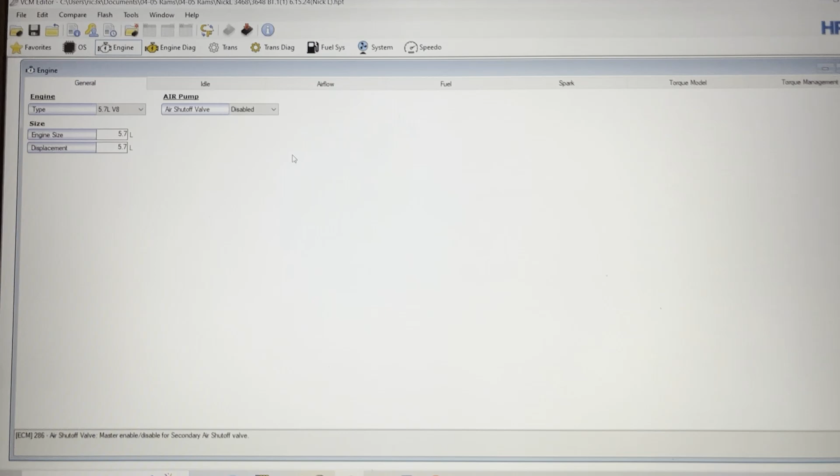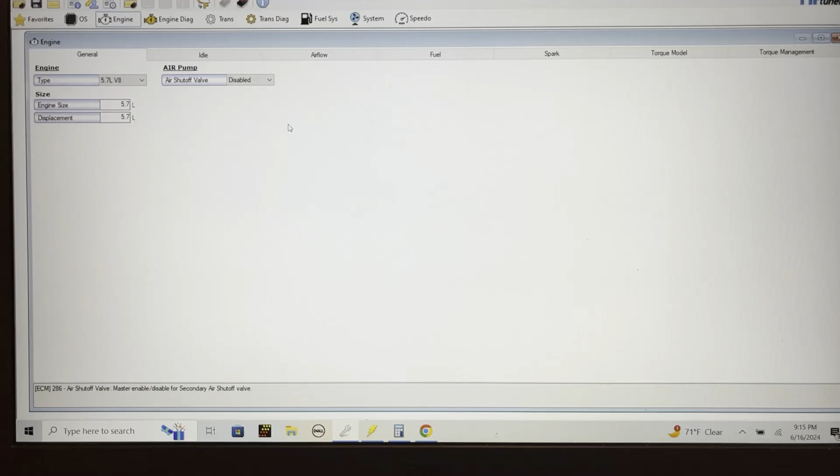Got contacted a couple weeks ago about tuning an '04 four-wheeler, 1500 standard. I believe it's a standard cab, might be a quad cab, but it's definitely a four-wheeler. The guy's got a 6.1 long block in it with the adapters. He's still using the '04 style truck intake. Apparently he's got the 6.1 injectors in it. So we're going to start doing some tune work for it. I'll take some videos of it.

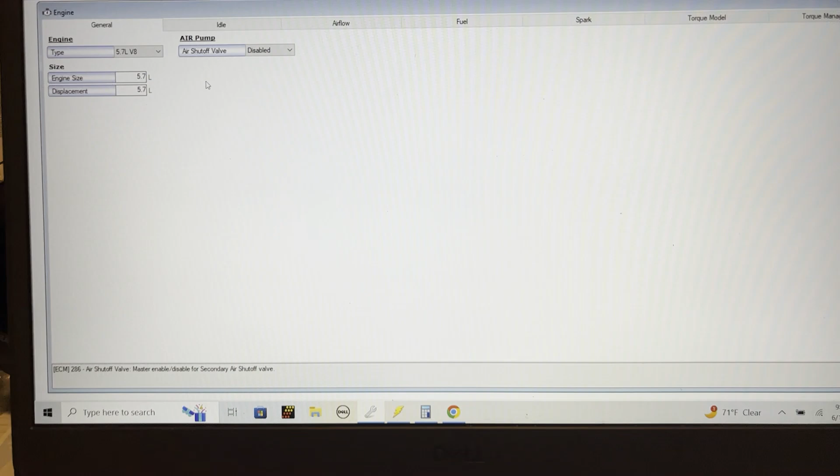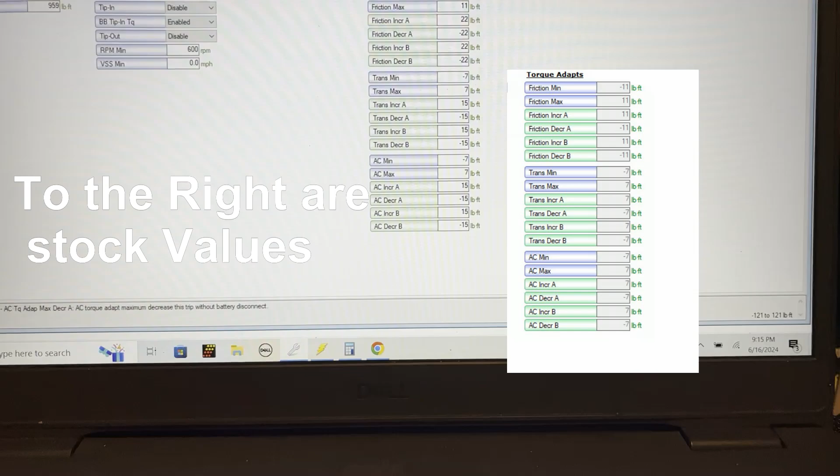So basically, this is the tune that he sent me, that he pulled off the truck with HP Tuners. So I'm going to open up a compare file. So we come over here to my 04-05 Rams. We got that one there, which is stock. And what he's running right now is, for the most part, stock. The startup injectors are different. And the only other thing I found that was different was some of the torque adapts. I've seen this increase here in a couple of 04s. So, fairly stock truck running a 6.1.

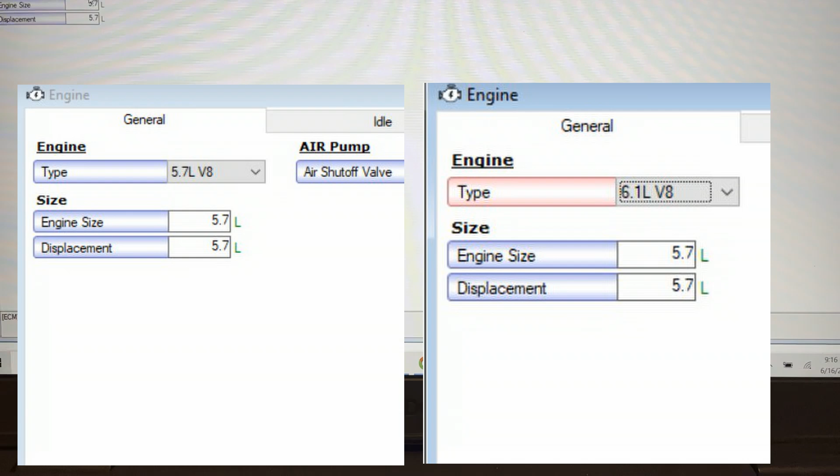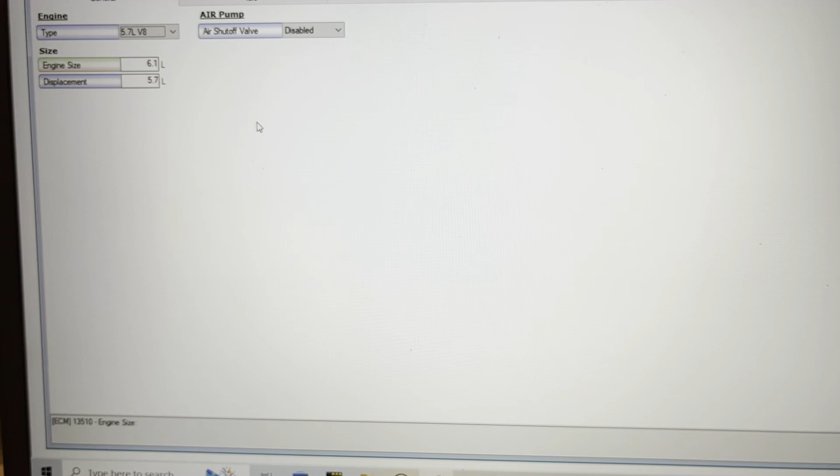So the first thing I did, I switched over to the 6.1. Then I switched this over to 6.1. Sent him off that tune, and it wouldn't start. So I changed engine type back to 5.7. Sent the tune off to him. So it should start with that.

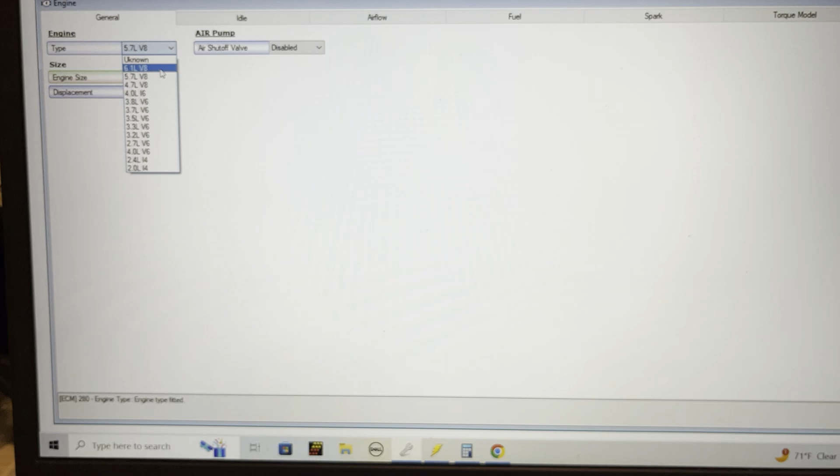I did a pair of my 04s that I got here. Did a test tune on that by changing that over to a 6.1, and neither one of those would start. But my early production 04, it's an August built truck, it'll run when I switch this to 6.1, but the other two wouldn't run when I switched it to 6.1.

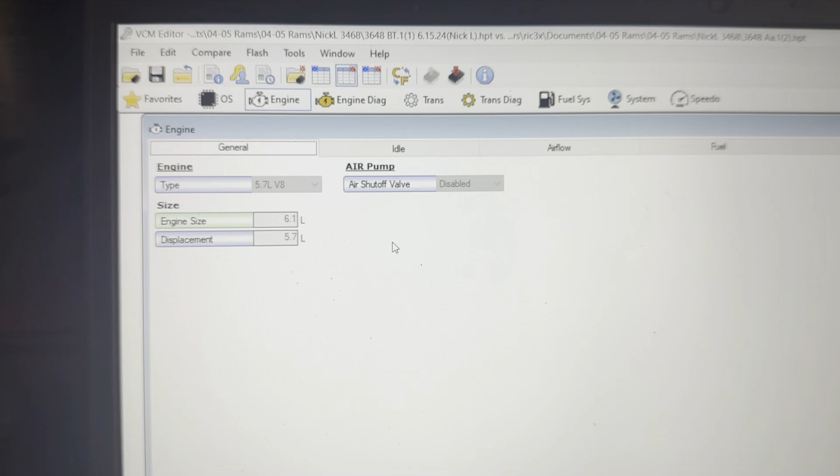Alright, so where do we start? The first thing we do is we increase engine size to 6.1, and we leave the type alone. As I explained earlier, it didn't really do anything for us. Come over here to idle. Let's get into general. I upped the VSS to 5 miles an hour. I do that on all my tunes. I found that it helps with coming to a complete stop, especially if you're doing it quickly.

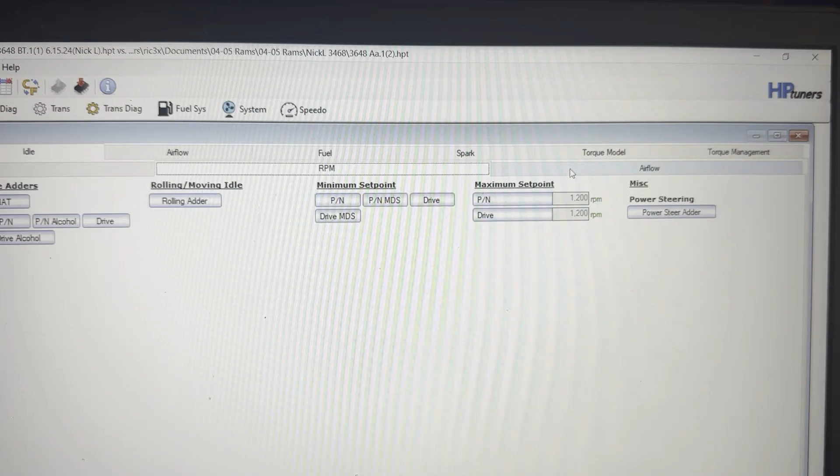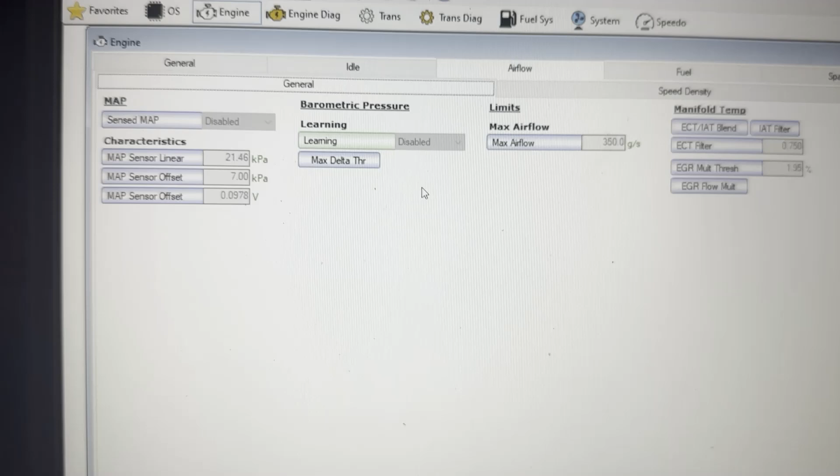So for this first tune, we left RPM. Idle airflow, we left all that alone. We come into airflow, left that alone. Speed density, left that alone. General. In general, what I do is barometric learning, I disable it. I think it just works out better. Especially if you're doing a boosted vehicle, you have to. It just turns into a mess.

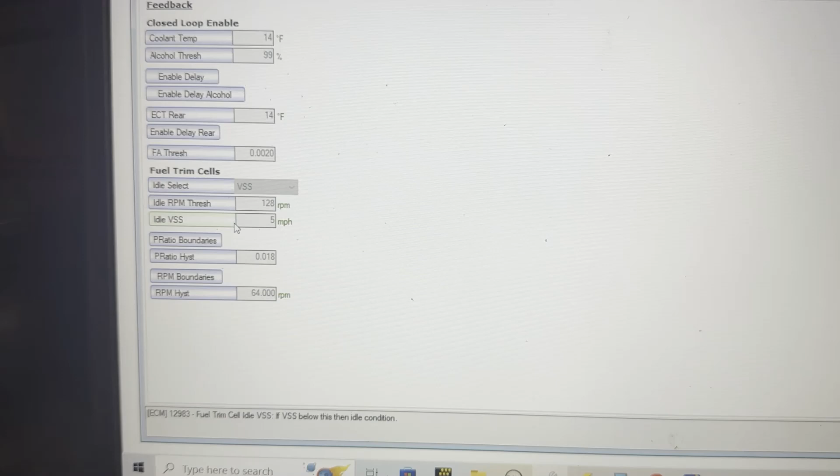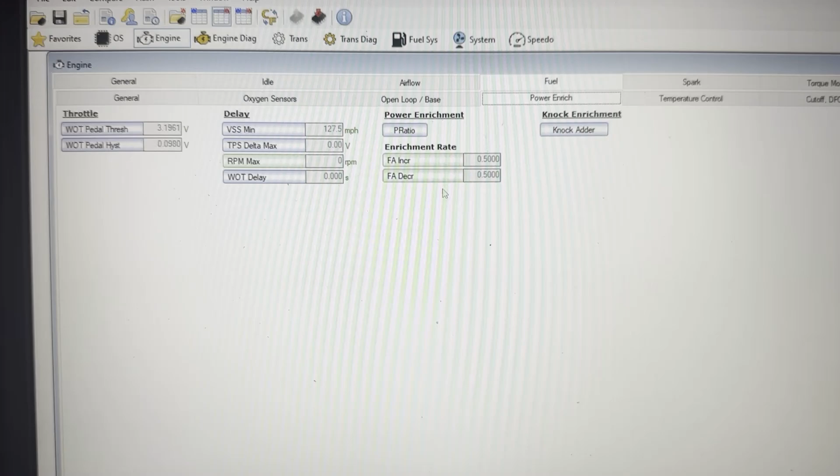All right, so let's go into our fuel. Fuel general, left it alone. Oxygen sensors, here again, up the VSS to 5 miles an hour. They don't have to match, but I just think they should match. So fuel, power enrich. RPM delay, set that down to 0. Fuel increment, I always set these to 0.5. Brings the fuel enrichment on quicker, takes it out quicker. Temp, left it alone. Cut off, left it alone.

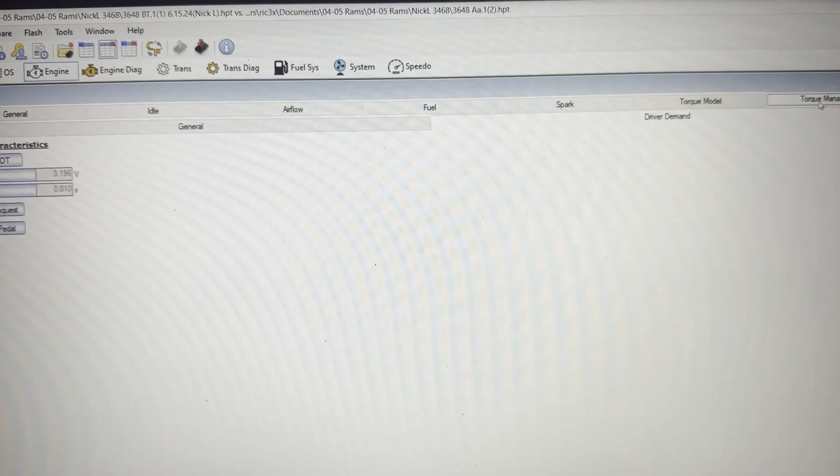Spark, I didn't touch anything in any of the spark. I just wanted to see how the truck was going to react with enlarging the engine size and disabling the barometric learning. All right, so that's where I started.

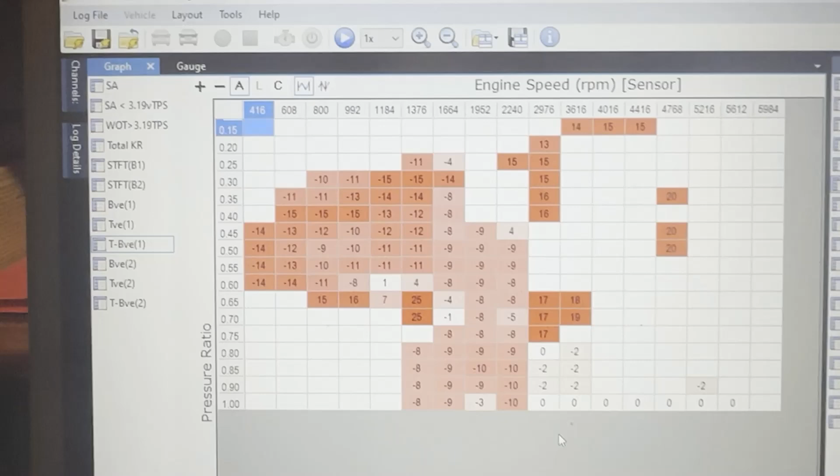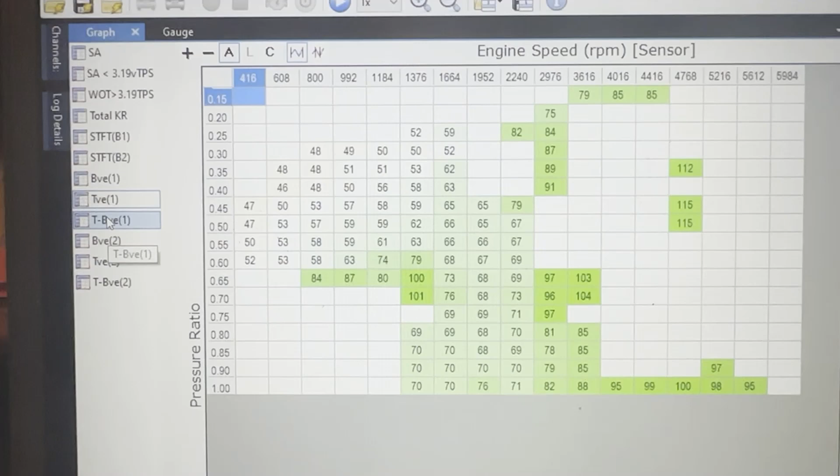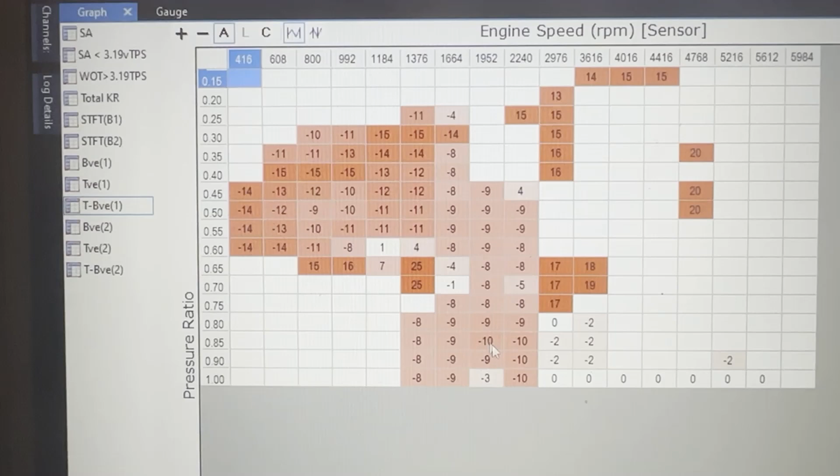All right, so we sent the tune off, and then he did a log, and here's what that log looked like when we go over it. So here is the base VE, and here's total VE. Now, if you notice, a lot of the base VE values are higher than total. So this math parameter that I do, which is total VE minus base VE, that's where it's at. So these are all really shitty numbers. The thing is running way rich.

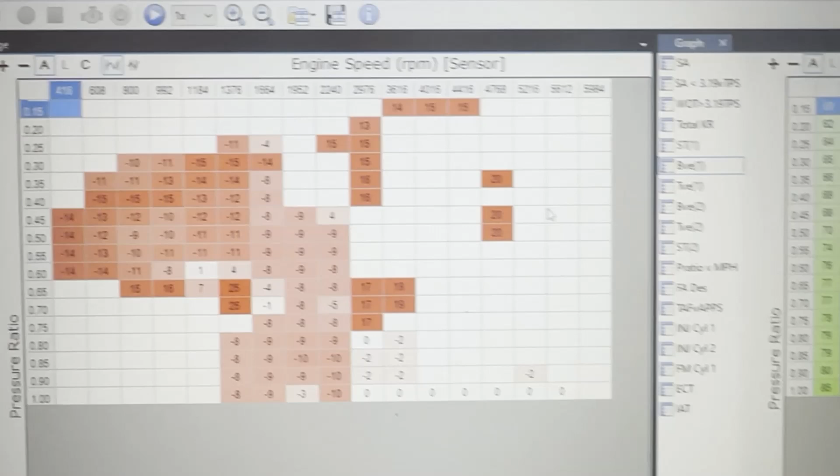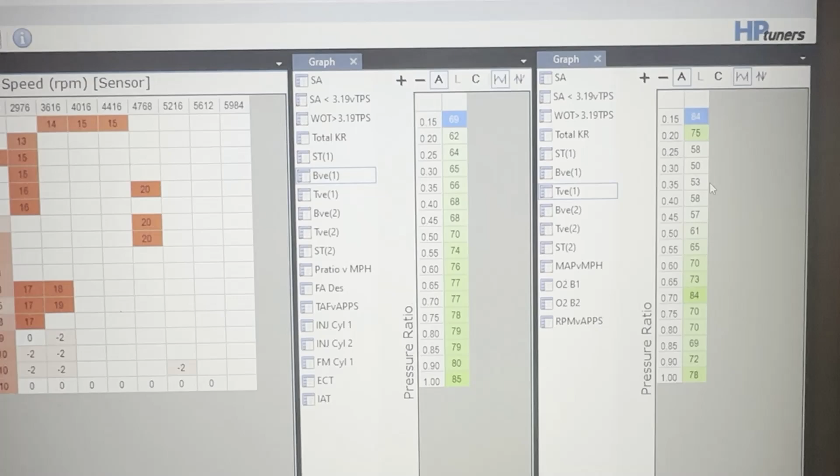So we come over here and we see our averages for our base, and then our averages for our total. These numbers should not be lower than these. All right, so what we wound up doing, keep saying we, and really isn't a we.

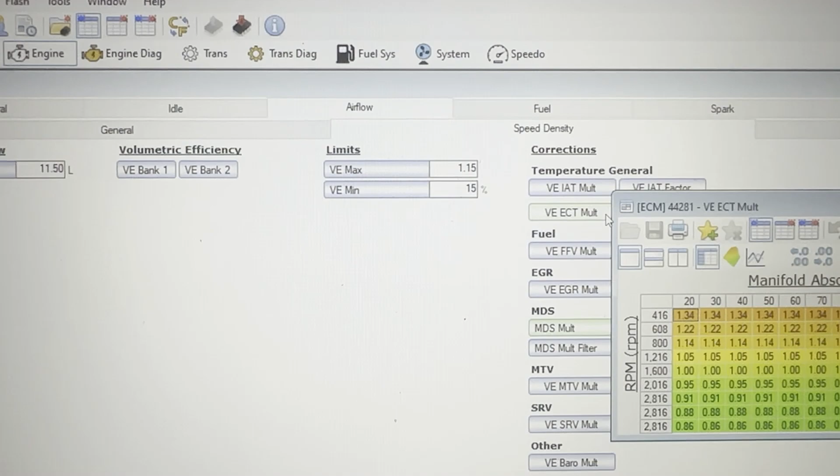But anyway, what I wound up doing was, first step I did was the VE engine coolant mult. I matched these to 6.1 values over top of what they were originally. So this is what they were originally. Actually, here, let me go back to that. That's what it was originally. And then these are the values I turned it into.

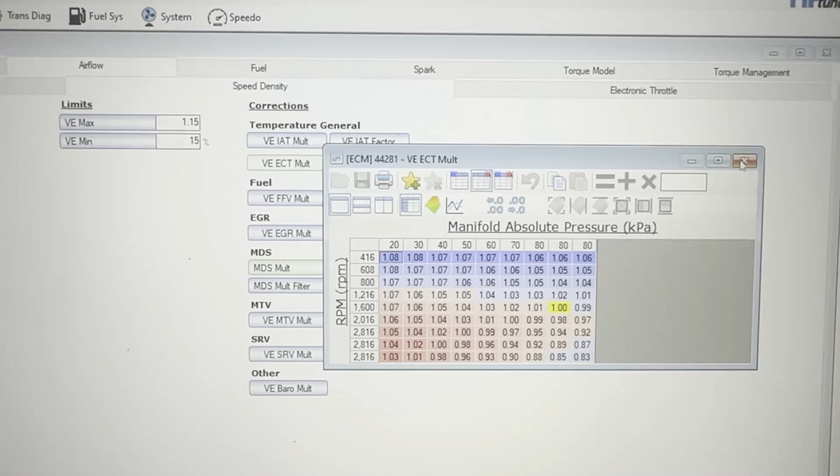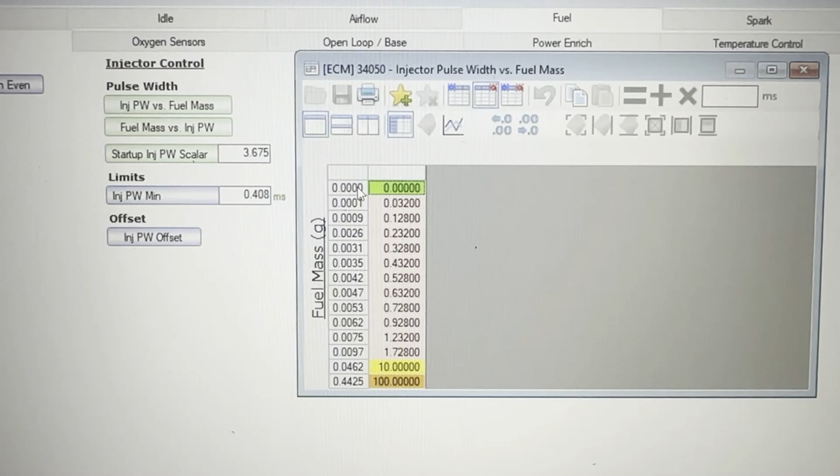And then the other thing we did was on fuel, general. These are all tune 2, and these are all 5.7 parameters. So what I had done was I converted it all over for the third tune, gave it all 6.1 parameters. So then sent the tune off.

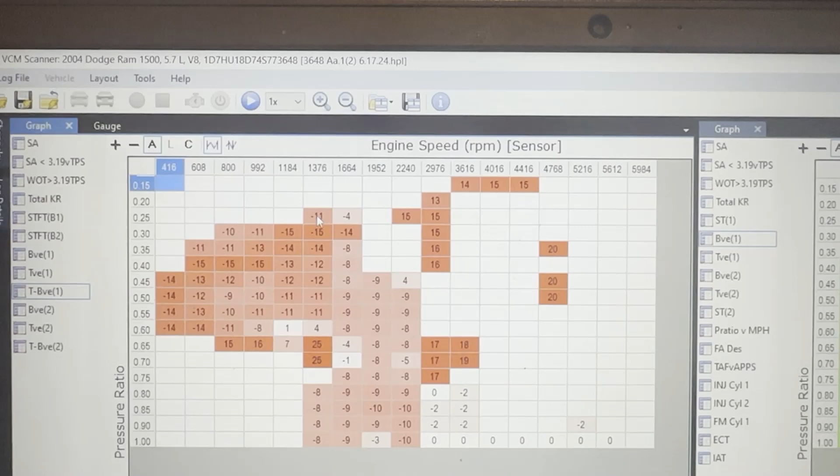Like I said, that was the first one. So this is tune. That's the first one. Let's get this straight. And then this is the third one. The VE was better. So that's where we went. Numbers are slightly closer. We can do short-term fuel. It was pulling and it was adding less fuel for short-term.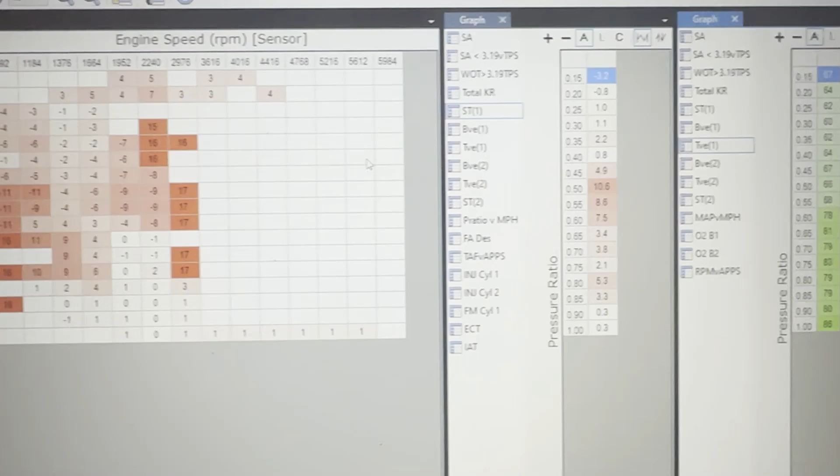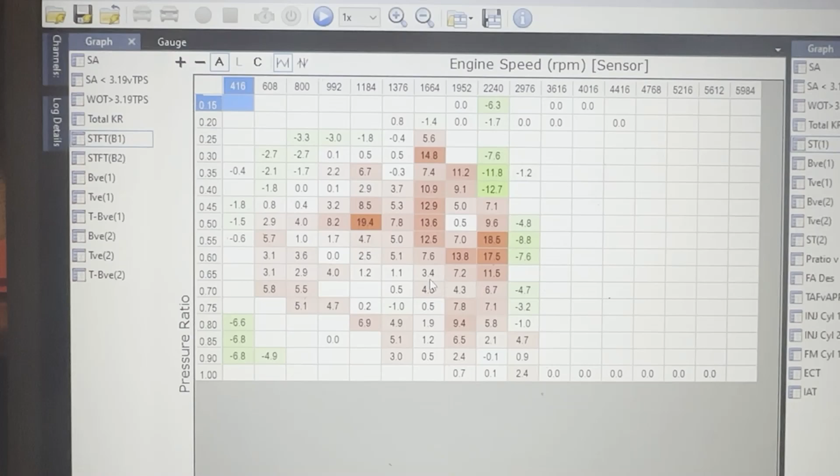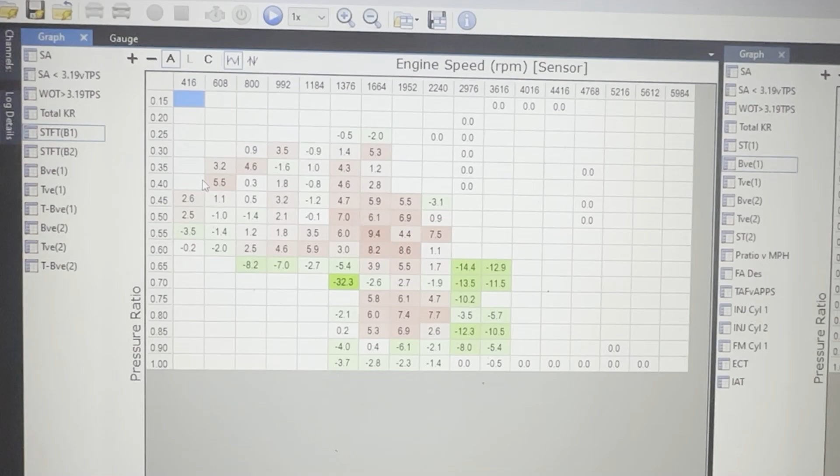Let's come over here. And come back. So this is where we came from with short-term. It was moving less around. So that was the third one. And then we'll show you what we're going to do.

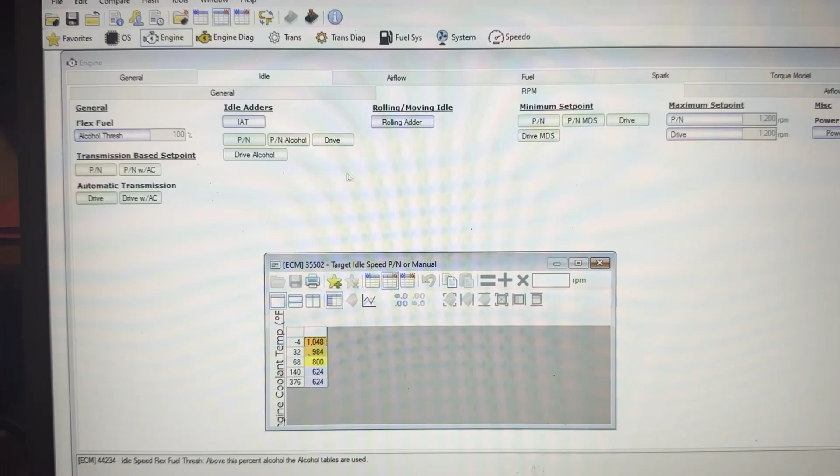All right, so after all that, what I wound up doing was I sent him off an exact copy of a tune I have, which is a 362 stroker motor, basically a 5.7 with a 6.4 crank in it, the 3.72 crank with 6.30 rods. So I made an exact copy of that tune, sent him off to see how the truck would run. Kind of figured it would run a lot better than what it did.

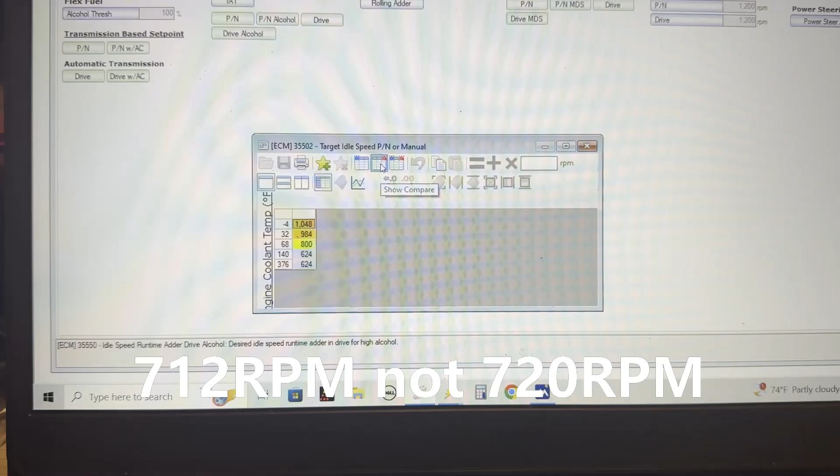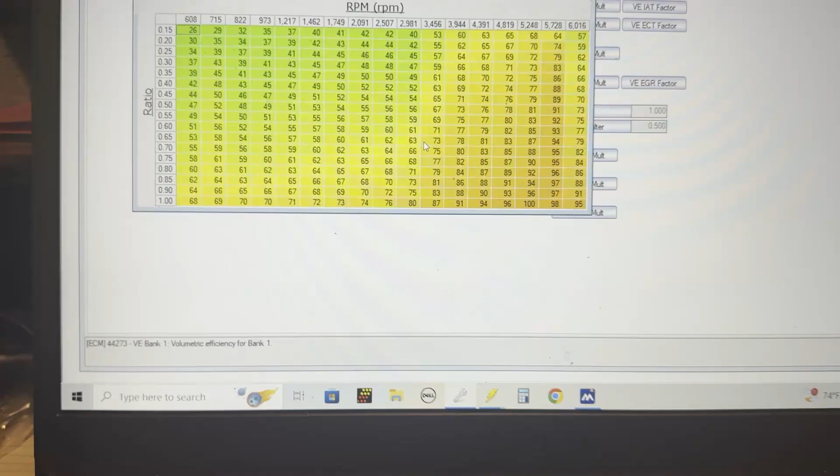And it's a wholesale change. Like the idle RPMs increased to 712 from 624. Then the airflow, VE bank, I worked it around a little bit. That's the VE bank that I use with this 362. This is the VE bank that we wound up having on that third tune.

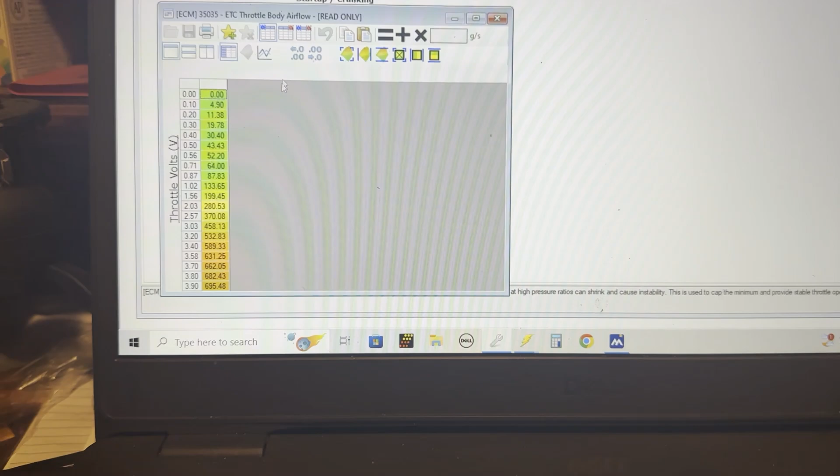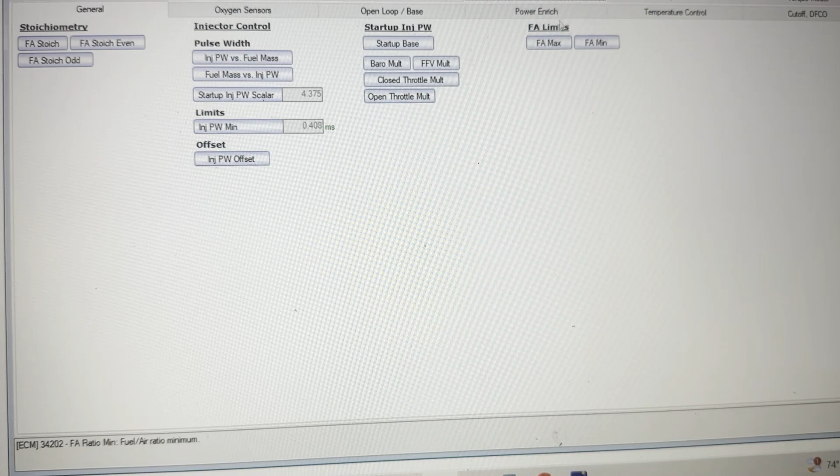Electronic throttle. I lowered. You can see what the values are. I lowered everything. That's what he was running with. Matched the small range. And then left the injectors alone. Left them with the 6.1 injectors, which is what I got on that 362. Power enrich, it's a little different. We're going to work on that.

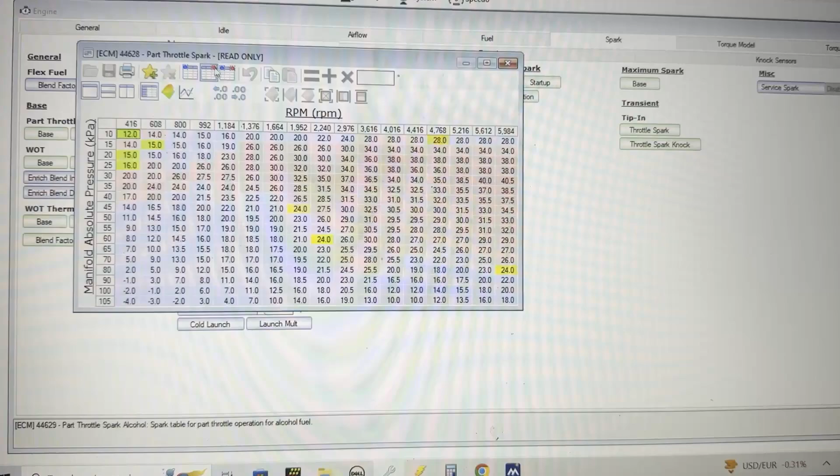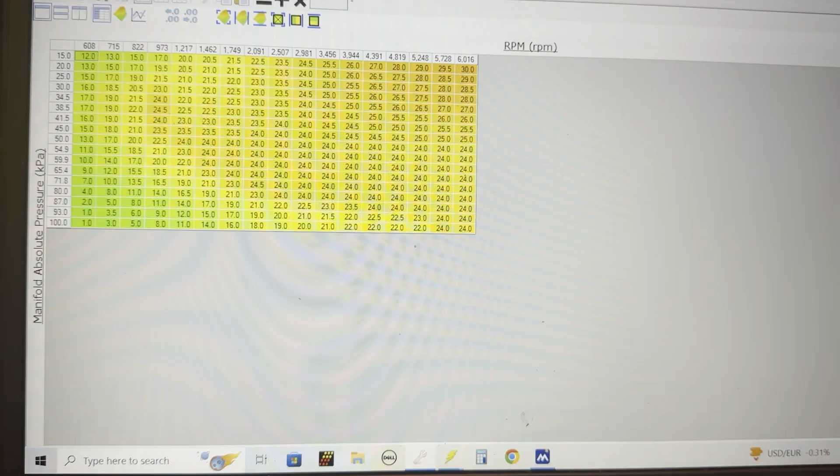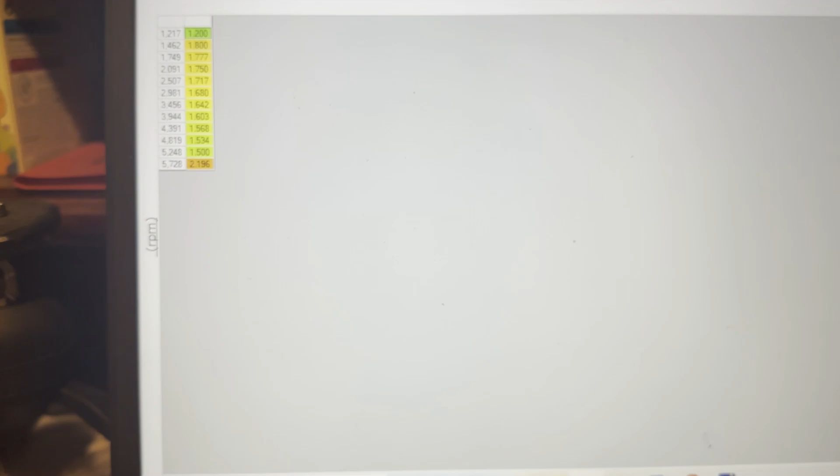Now for spark, completely different animal. What I wound up doing was I converted, this is the stock 5.7 RPM scale. This is an RPM scale that I use a lot, 608 to 6016. It's all 24s, a lot of 24s. It's capped up in here. We're going to work on that for the next tune. One of the things I do with the knock sensors is that stock, and that's what I wind up doing. I just change this RPM scale so it's more in tune with actual driving habits.

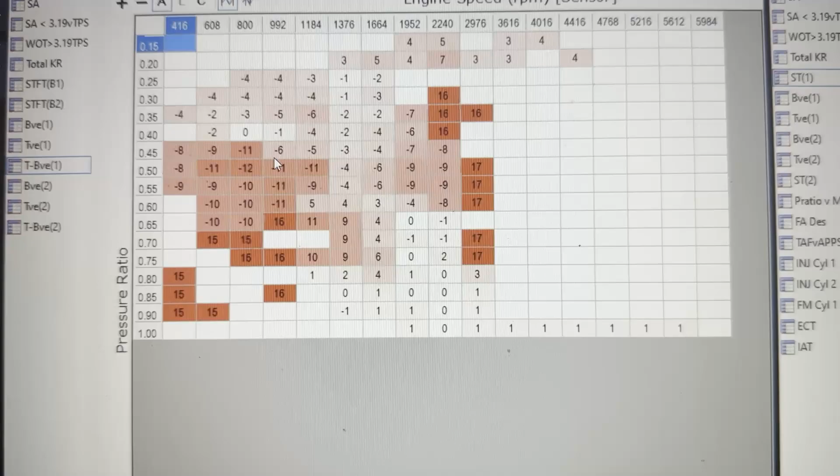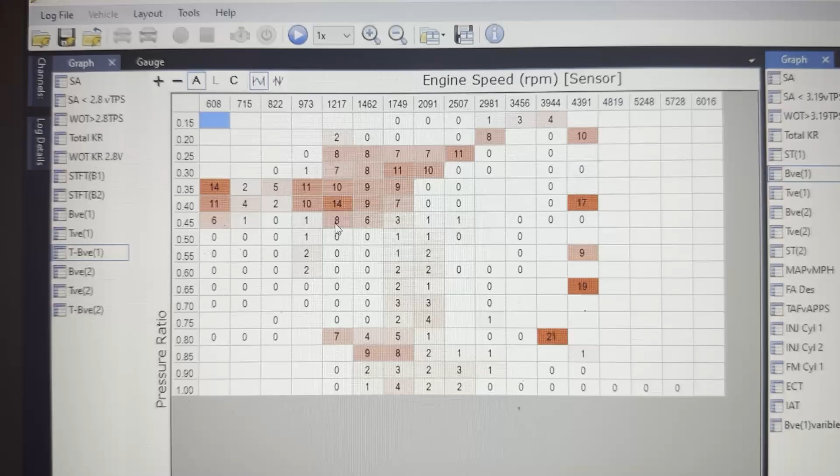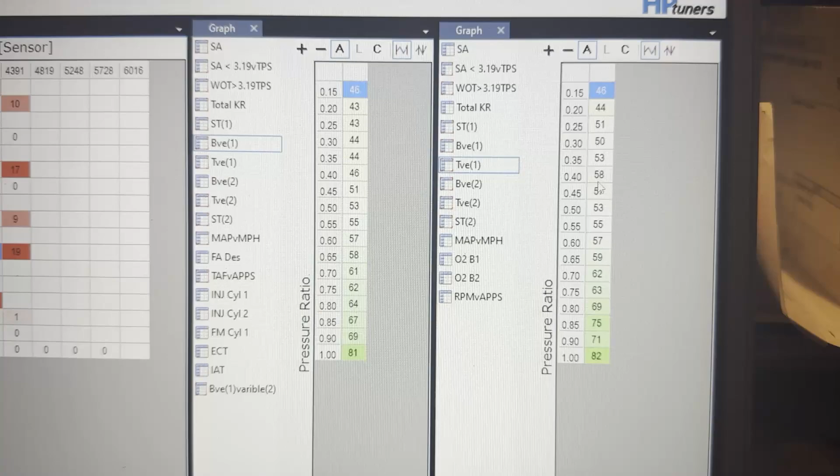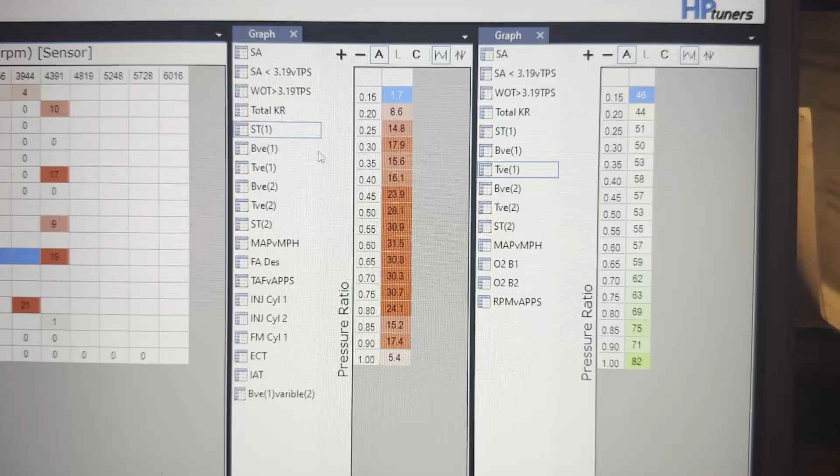Alrighty, so what did that give us? So this here was that third tune. And then this is what the truck ran like with my 362 tune. You notice there's a lot more zeros there. Come over in here. Our base is fundamentally lower. So now it wants to run richer. I mean, you can tell by the short term that it's adding a lot of fuel.

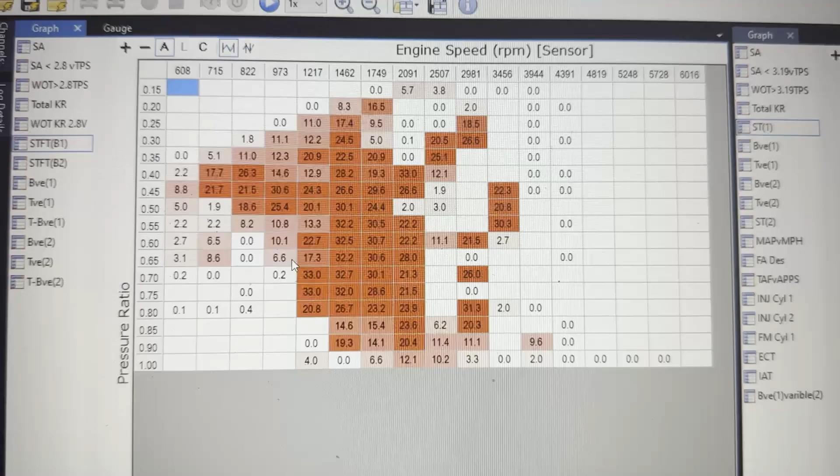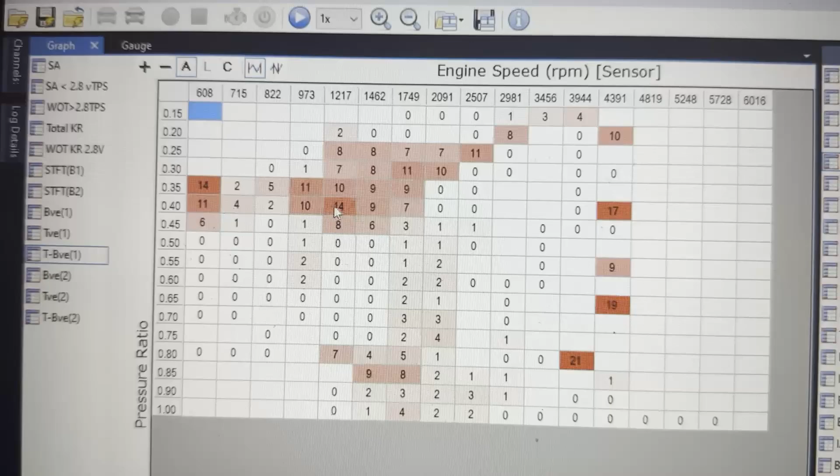Come over here to this short term here. You can see lots of red, lots of 24, a couple 28. So, I mean, the fueling is off. That's the only way I can put it. Now, the VE is better in some of the drive area, but obviously you can see in the idle area, off throttle, low throttle, it's still off. So we're going to work on that, and that's what we're going to do next.